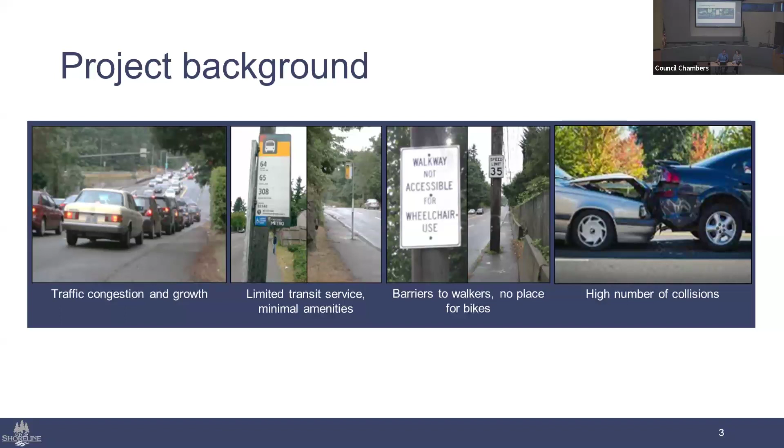This project started quite a long time ago. Back in 2015, scoping for this project began, and we held a series of public outreach events and traffic modeling of various options for the interchange. After a year of interagency meetings, citizen advisory task meetings, open houses, and city council presentations, the council adopted the current scope for a dual roundabout interchange at I-5 and the widened 145th corridor to the west, to allow for left turn movement capacity. That occurred in March and April of 2016.

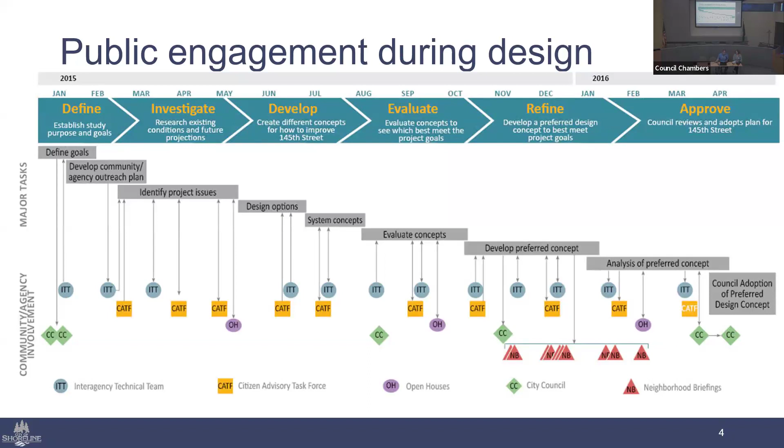As I mentioned, part of that was selecting the roundabout. So the real question is, why did we select roundabouts at the interchange? Roundabouts are designed to make intersections safer and more efficient for drivers, pedestrians, and cyclists. They do a great job of passively slowing drivers down prior to entering the intersection, while also providing a better entry angle to merge with oncoming traffic. Studies by the Federal Highway Administration have found that roundabouts can increase traffic capacity by 30 to 50% compared to a traditional signalized intersection. Driving through a typical intersection usually includes coming to a complete stop, idling, and then accelerating to proceed through. But with a roundabout, you can typically coast through and eliminate the need to stop and reaccelerate, which really reduces fuel consumption at those intersections.

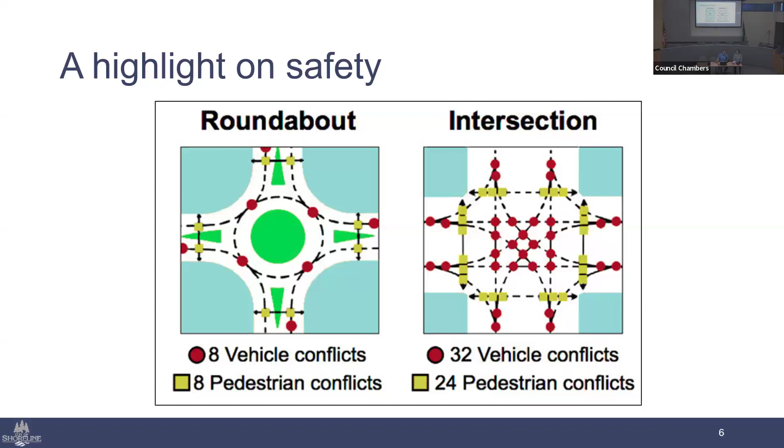To further highlight the safety aspect, this is one of my favorite graphics about roundabouts. It highlights how many conflict points exist at both a roundabout and a regular signalized intersection. I don't know if you can see all the numbers, but in a roundabout you're limited to 8 vehicle conflict points and 8 pedestrian conflict points. With a regular intersection, there exist 32 vehicle conflict points and 24 pedestrian points. A Kansas State University study actually found that roundabouts reduced vehicle collisions by 39%, while further reducing serious and fatal collisions by 90% and 76% respectively.

So once we decided on roundabouts, we actually had to deliver the project. And as we looked at the corridor in its entirety, it was daunting. So we opted to split up the corridor.

Into 4.5 different projects. To the east is the I-5 interchange project, which includes the roundabouts and work from 6th to just about First Avenue.

Phase 1 of the corridor project goes from First Avenue to Corliss, and that does some major intersection improvements at First Avenue while also creating a pedestrian crossing at Corliss.

Phases 2 and 3 will continue some of the expansion for left turn capacity and also widening of the sidewalk, predominantly in phase 2 through Meridian.

Phase 3 continues that work to create increased pedestrian mobility by improving the ADA ramps and doing some selective widening and barrier removal where appropriate, bringing that multimodal capacity all the way out to Linden Avenue or the Interurban Trail.

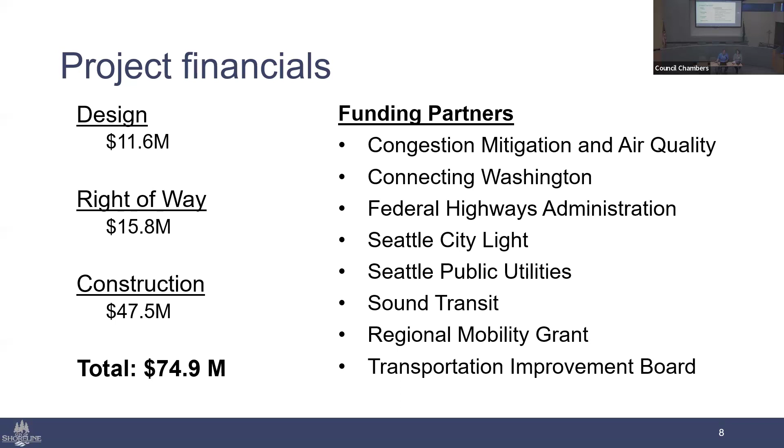The timeline for phase 1 and the interchange: we're going to be constructing in 2024 and 2025. At the same time, we're going to start up or restart design on phases 2 and 3, starting in 2024 and extending through 2025.

We're also going to begin our right-of-way phase, which is acquiring parcels to complete our improvements. We'll start that probably towards the end of 2024, but really reaching out to residents in 2025. Then phases 2 and 3 and the off-corridor bike network, we look to construct in 2026 and 2027.

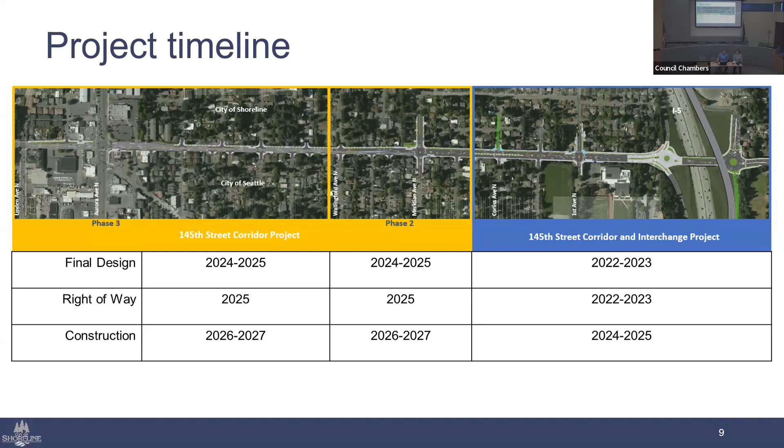We executed the contract with Johansen Construction Company, who was our low bidder for the project. We executed on January 31st, 2024 of this year. In February and March, they've been preparing their work crews and ordering materials and generally getting ready for work.

There's a lot of complicated material procurement that needs to happen on this project, so we provided them 60 days to start getting materials. That leads us to April 1st, which was the start of the real on-site work, and that began with the full closure.

Johansen and various utility companies will be working within the full closure to relocate the major utilities that are under 145th on the west side. That'll be from April to October, which is that 7-month timeline.

Then towards the end of April, they're going to be removing trees on the south side, also west of I-5 - that's within city of Seattle limits. Then about mid-June, early to mid-June, they're going to be moving to the east side to remove trees over there.

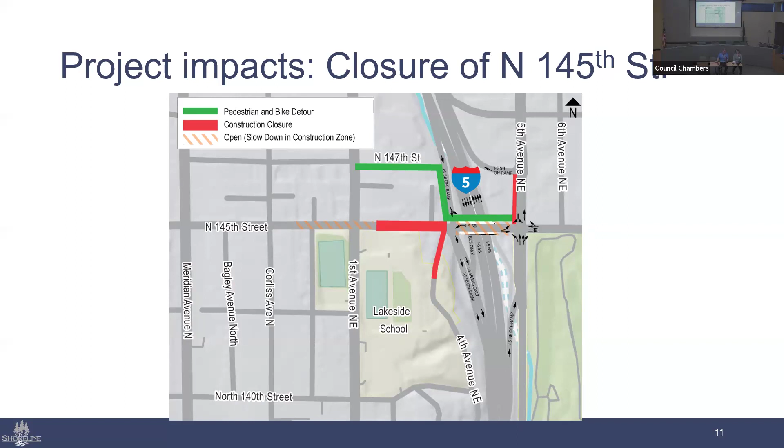At a wider level, while we have that closure in place, we do need a detour around it. The detour routing has been set up to guide drivers to 155th, to cross under I-5 and access both the northbound and southbound ramps from the east side. All the ramps are open, nothing's affecting them — you'll just have to get to them from the east side. There will also be no impact to the primary north and south routes of Meridian, 1st, 5th, and 15th, which will allow drivers to get to 155th as well as the interchanges at 175th and 130th.

This is the detour that will be in place for the 7 months of the closure of 145th.

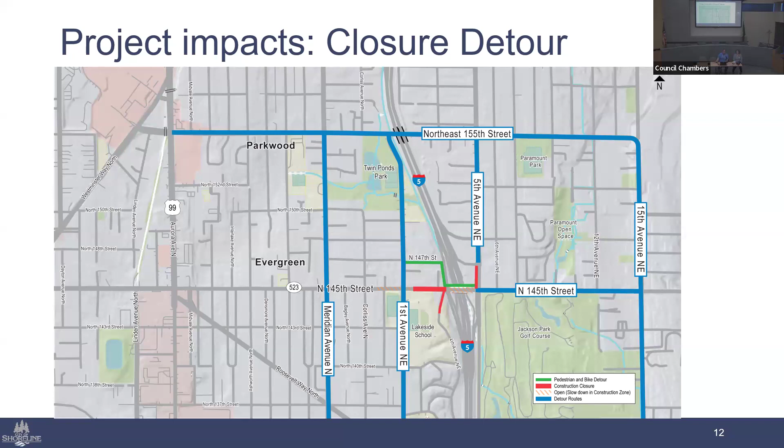Another thing we wanted to touch on tonight is the impact to trees that this project is generating. We understand the value that trees have to the community and the environment, and we do not take the decision to remove these trees lightly. We understand their role in urban heat islands.

In its current condition, 145th Street is heavily congested and accident prone, and largely pedestrian and bicycle inaccessible. Our climate goals have informed our work on this project, with the primary goal being to reduce community-wide driving and idling traffic. Currently, transportation is Shoreline's largest greenhouse gas emission source, accounting for 55% of the total community-wide emissions in 2019. So this project is supporting that effort in reducing greenhouse gases.

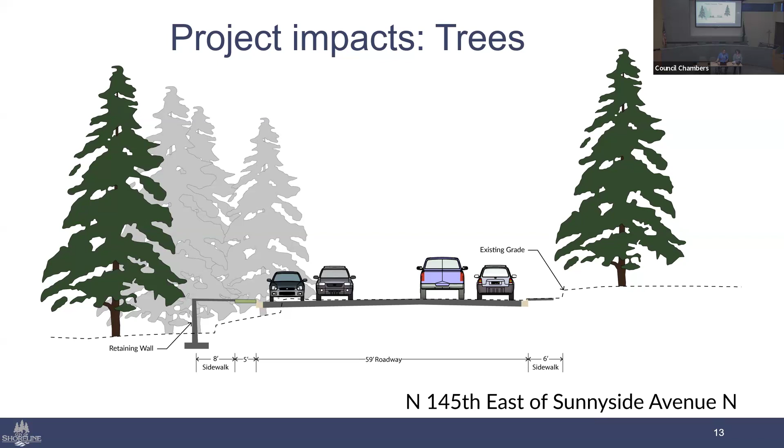Another thing I wanted to touch on is work zone safety. I did talk about how pedestrians will be using the existing sidewalk on the north side of 145th. This will be sandwiched between two work zones. So I really want to emphasize that for pedestrians, please stay on the guided path and stay out of the work zones. This project has very hazardous work within its limits, including tree felling, deep trench excavations, and large materials being lifted by cranes overhead.

The danger can come from any direction, and the safest place is outside of the work zone. So following the signage and staying out of the work zone are incredibly important.

I also want to reiterate for drivers, especially on the detour, but also after the closure is removed, there's going to be a lot of different traffic control setups as we work across the whole roadway prism. So things can change. As a reminder, drivers should slow down when navigating the project limits and the detour route, and drive the posted speeds. Please be kind to workers and fellow drivers.

Pay attention every day. Small changes to signage and traffic flow are expected, especially as we get out of the 7-month full closure. And stay calm by giving yourself extra time or by taking an alternate route that is more consistent.

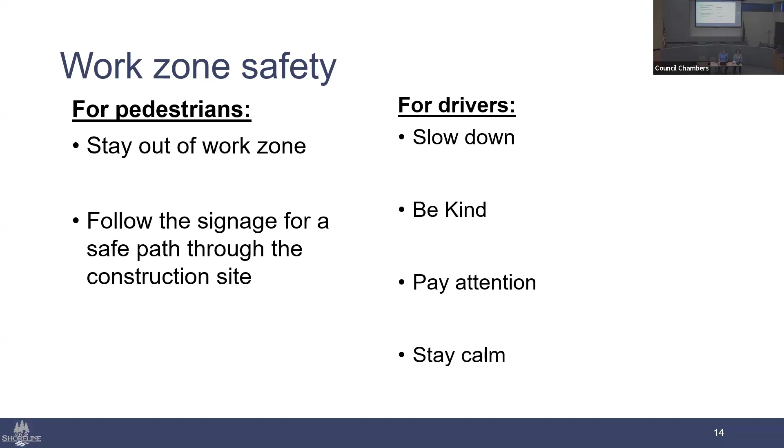So this is a large project with a lot of changes. We are committed to communicating in a lot of different formats consistently throughout the project. We're going to be using road signs, many briefings and meetings like this one, email and website updates, and poster and flyer distribution. Some of you may have already met Elizabeth as she walked the sites.

We also want to use events like this to connect with community members. The information we share today, we understand not everybody could be here. So by sharing the information with the people who could attend, we're hoping that message spreads and that people can gain information from those here, know who to call, us or some of our contact cards, but just trying to spread this message and build those relationships.

Another way to stay updated is we have an email listserv. We have the Engage Shoreline website, and we also have a 24-hour hotline. There's a QR code here which you can scan. I also have business cards right back there. Everybody can take one, it's got this information on it. Especially the Engage website will have the most up-to-date information about schedules and traffic control.

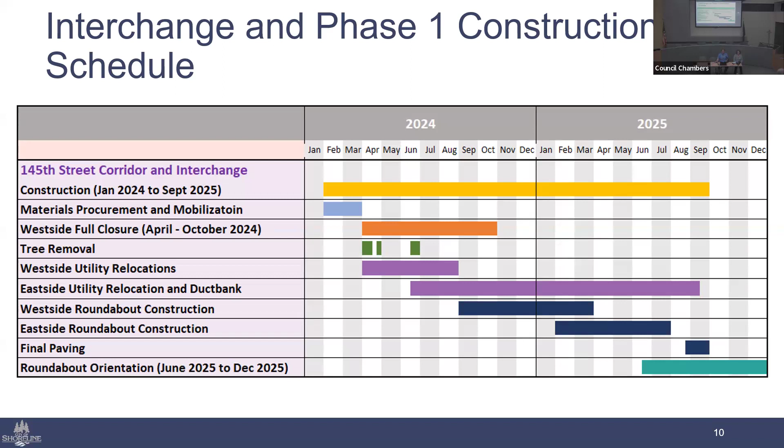My question kind of goes back to the issue over in Kirkland. We're talking about an interstate that's like four lanes of heavy traffic at times coming off. Right now there's a stoplight there, but you have a free right turn when you can take one. Having a roundabout off of I-5 where you're off-ramping and on-ramping on both sides of the freeway like that — we're not talking about a highway like Highway 9 or 2, we're talking about an interstate. That's a lot of traffic coming off. How's that not gonna back up onto the freeway?

Okay, I'm gonna meter myself because I love roundabouts a lot. There's a lot of small things we can do with this roundabout. We are maintaining a right turn slip lane — a lane that is separated from the roundabout. So when you're coming off of southbound and taking that right onto westbound 145th, you don't enter the roundabout. You just stay to the right and slip right through.